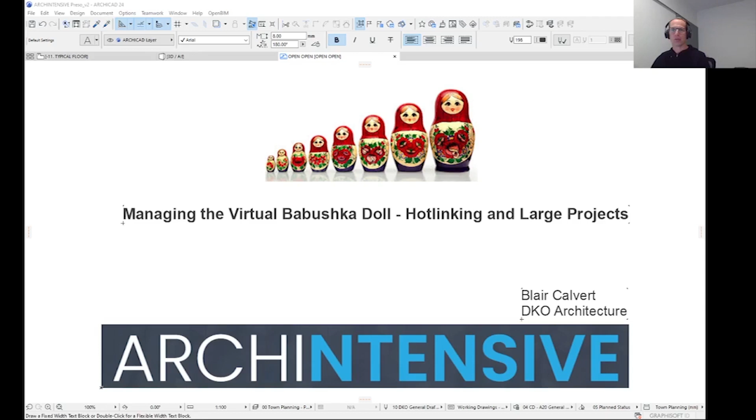So I'll give you a quick intro about DKO. Who are we? We started off in 2000 as a handful of people in Melbourne. We've now grown over the years through a fair bit of regression, ups and downs, and we're now running at about 200 people, primarily across Australia, but also in Vietnam and an Auckland office. Melbourne would be considered our key home office with close to 90 staff there.

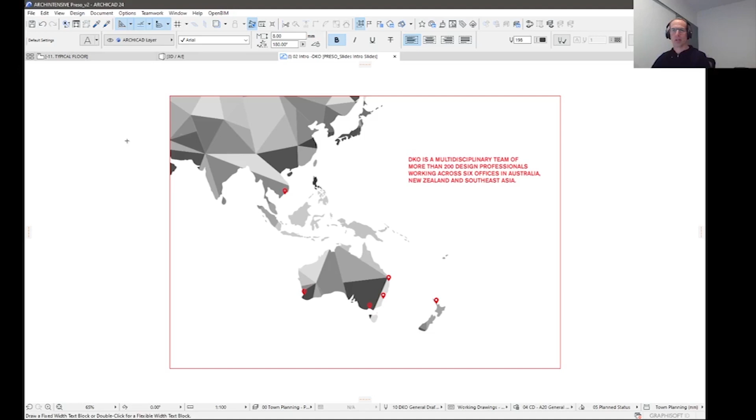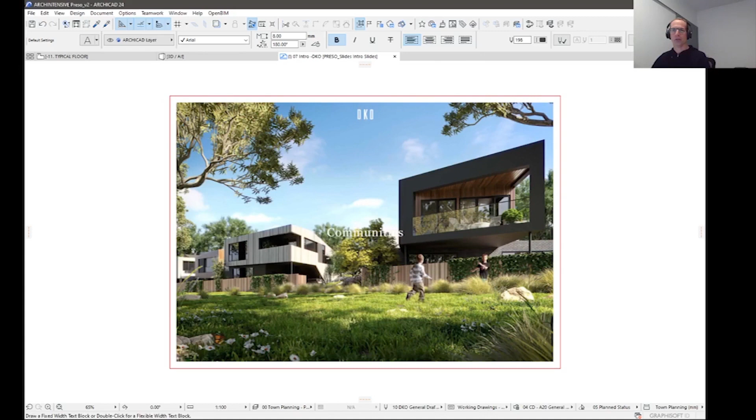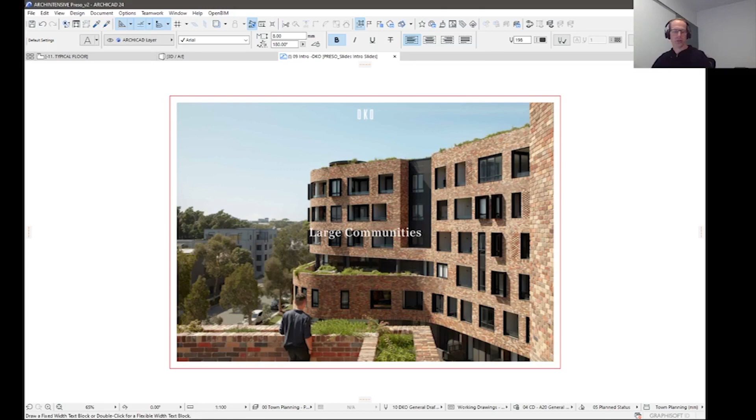So what sort of projects does DKO do? Everything from interiors, one-off homes, terrace homes, communities - and there's a variety of communities that we do from a master planning level. Some are small communities, apartment blocks and the like. Large communities where we do multi-use, multi-res, and vertical communities. So we do a few high-rise buildings, a number of which - this is Marina Tower, which is over 40 stories, about 450 apartments.

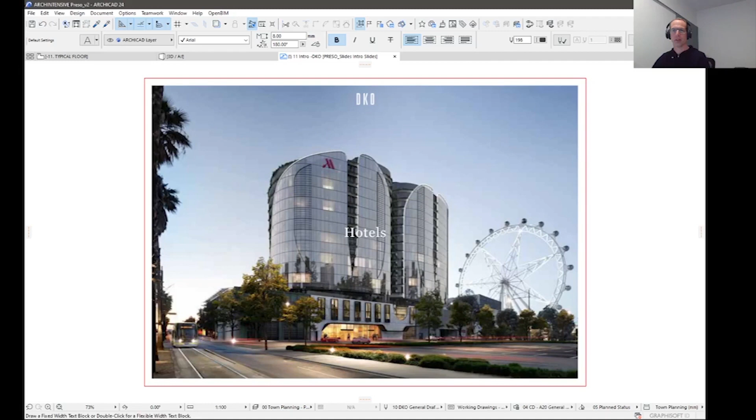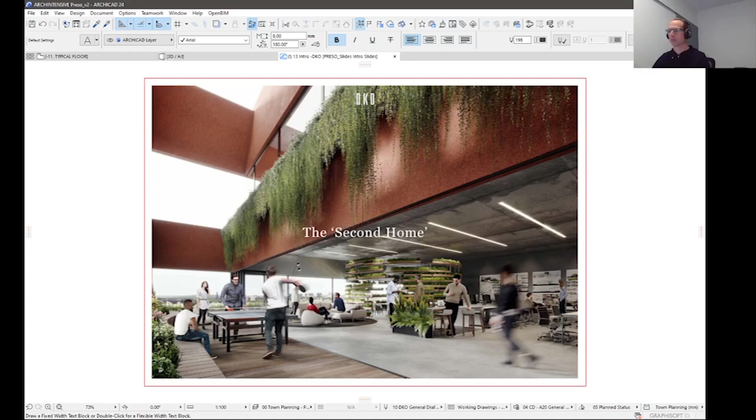In recent years we've done quite a bit of hotel work - this one's the Marriott in Docklands. Hotel interiors obviously tie in with that. Second home, also known as the workplace. And urban design - so a fair bit of master planning, urban design component. This is Docklands, obviously encompassing Marina Tower.

Why is this relevant for what we're talking about today? We'll be talking about large projects, specifically tall ones and wide ones. Where that's relevant for modules is we use a lot of modularity in our designs and our documentation, and Archicad works very well with modulation. We find that the nature of the company and the size of projects we work for, and the teams that we construct, tend to push us in directions in regards to where the workflows are and how we use our modules.

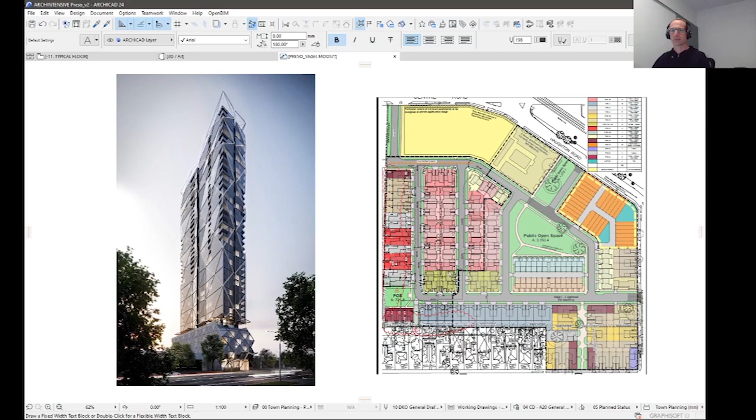So we'll run through a couple of basic things in regards to modules. Worth noting that the general out-of-the-box Archicad guide on modules is worth a read if you're unfamiliar with what modules are. I'll give you a bit of a rundown here. In essence, you're looking at modules as a mini PLN file, effectively - a small file which contains plan information, 3D information, but not a lot else. It's fairly well stripped back, so it doesn't contain any views, sections or elevations, and it also has a very limited range of libraries and attributes attached to it. So you'll find they are substantially smaller than a PLN file.

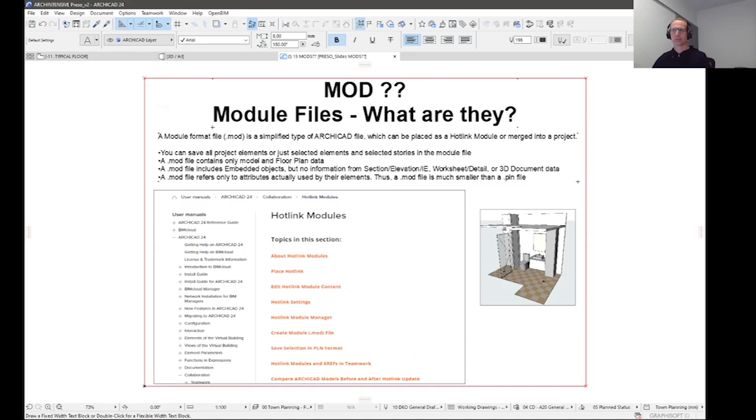Why do we use these things? A very small example here, but effectively efficiency and consistency - the ability to use the same thing over and over again and not have to re-document it in every instance. You start working in types rather than instances, which works very well from an efficiency point of view. There are a few parameters around that.

Obviously, a module is exactly that - it's a module, like a Lego brick. You can't alter it, and so you can't modify these things as you go. You need to be really rigorous about how you use them, because every variation either breaks the module or creates a new module. And you can get to a point where if you've modified enough modules, it probably wasn't worth having modules in the first place.

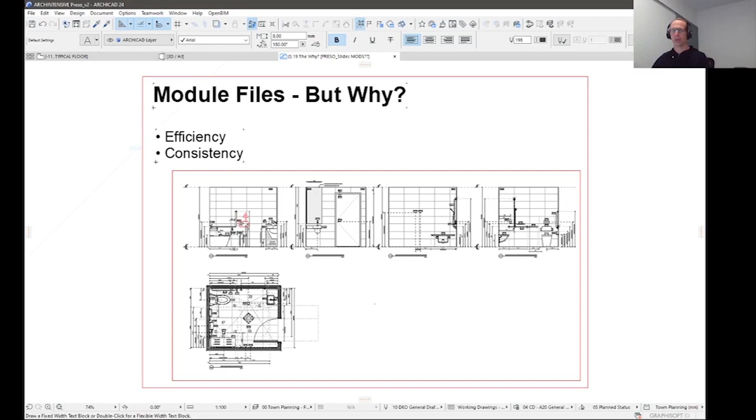So you can see an example here. We've got a bathroom type. This bathroom type will be used throughout a project. All going well, it'll be used numerous times to the point where you could have it documented once,

but exists 50 times across the building. Also consistency - we find that if you have specified a product, you draw it once, you specify it once, and it's consistent throughout the project. Downside of that is if you've got it wrong in one place, you'll have it wrong in 50 places.

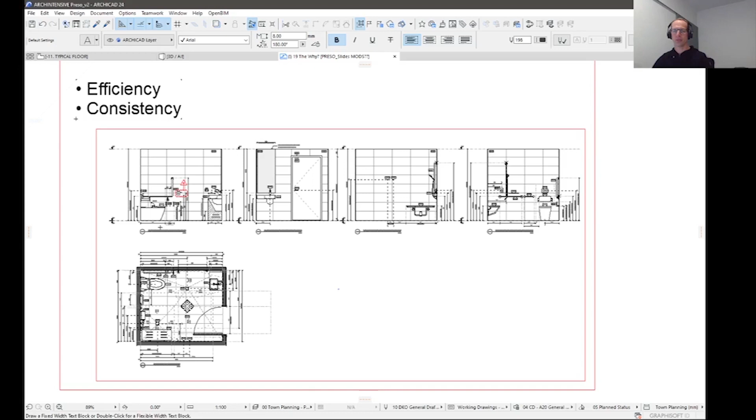A couple of basics. Now, there's a couple of snapshots out of the Graphisoft guide. We'll talk about the way DKO use the modules and how we think you should use them. So how we'd recommend - a couple of examples here.

One of the methods of creating a module is to do file save as from a PLN, and it will basically save out a .mod file of it, and it will dump out pretty much all the associated extra data in there other than just your floor plan data and your 3D data. So any views, attributes, external libraries, etc. will all disappear.

You really shouldn't be creating modules like that if you're planning on using them throughout a building in a modular sense. Saving stories as a module - would recommend against this as well. The primary thing is if you're going to push out a module, it really should be a published entity.

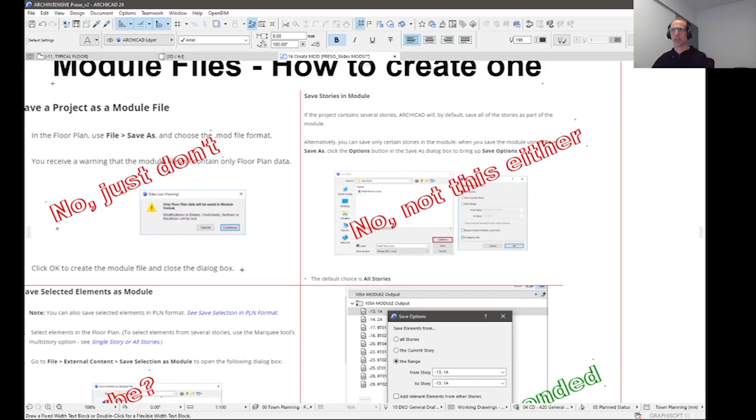And saving selected modules or elements as a module, you can do it. You can basically select things on a floor plan and do save as module. There's instances where you may want to do that, especially if you're doing some rapid prototyping and you've got a number of different examples all drawn up on the same floor plan.

The issue with that is consistency. If you inadvertently select a different group of elements from the initial elements that you'd selected last time you saved that module, you'll get inconsistent results. The other trap is if you've got things grouped, you may find that one item that's grouped inside a selection you've got ends up expanding your module out well beyond what you thought it was. You may have elements halfway across the page that you weren't expecting.

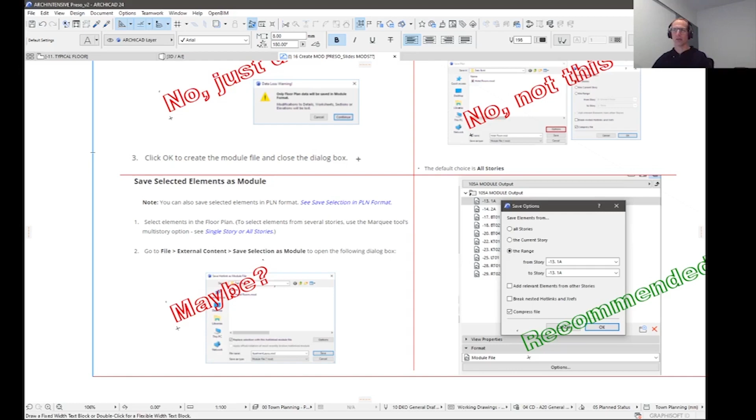90% of the module creation that we would do at DKO is out through a published set, and you go through and it's a story by story thing, and you'll publish the element out. It gives you a consistent response in regards to the naming always being the same. The content obviously will change in itself, but the parameters around the content won't, so it'll always be from the same floor plan, from the same layer combination, etc.

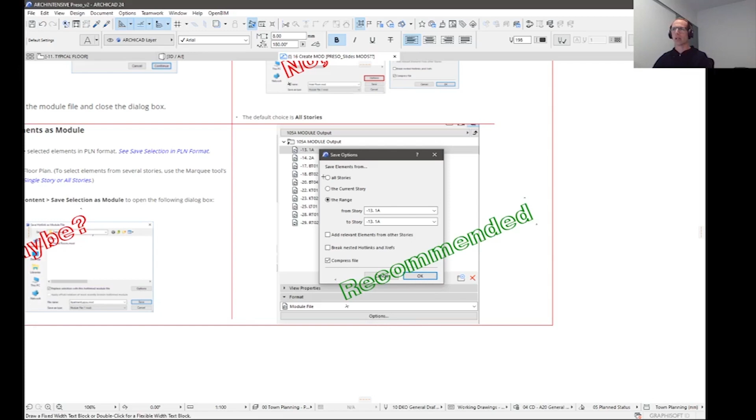So I'll just take you through a quick thing here to show you creating a mod. So I've got a file here with a bunch of template content in it. So here we've got a bathroom. You'll notice it looks pretty messy. That's because we've got all the layers on.

One important thing to note is when you publish out a mod, it will only publish the things that we'll see on screen. So your layer combination - we've got a layer combination here called modules out, which is generally the majority of the layers that we have in our layer list. The layers will be filtered at the other end in regards to what you're looking at. So the project that you insert the module into, it will just use the layers and layer combination from there.

You're better off publishing out more modules, more layers rather than less. Another key trick is if you're using any solid modeling operations, and that's a hidden layer that you would use, the solid modeling layer that you use must travel with the module, otherwise you'll lose that linkage.

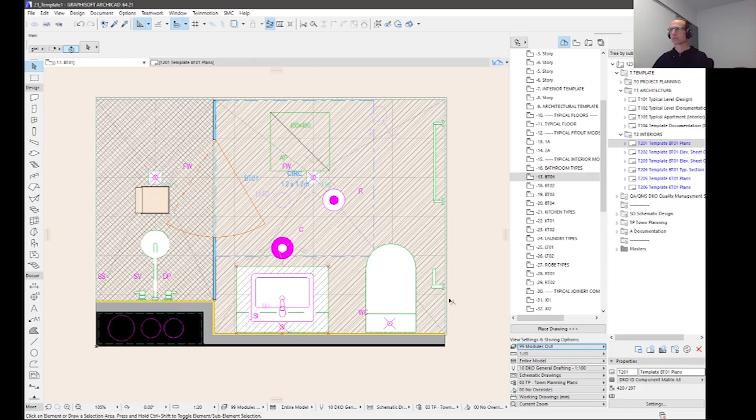So in regards to how to publish this out, I've got some content here. It's on -17. From here you can see that there's bathroom type 1 here. We've got the modules out layer combination, which has everything you've got there. That then transfers out into a publisher set.

Pay attention to these. It's important that you check these settings. This is just a single story mod, so it can go out just with the current story range. If you're doing something along the lines of a townhouse or other multi-story mod, you need to check this range and select the range for what you want to publish out.

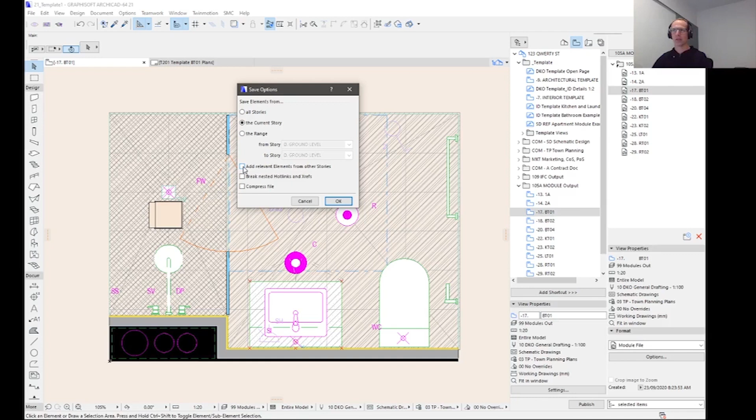We generally leave this one off. We don't generally want to see things published from other stories, especially if you've got things showing on level above, like a stair or something. You may well end up with duplicates of that being published in like a negative story or a lower positive story.

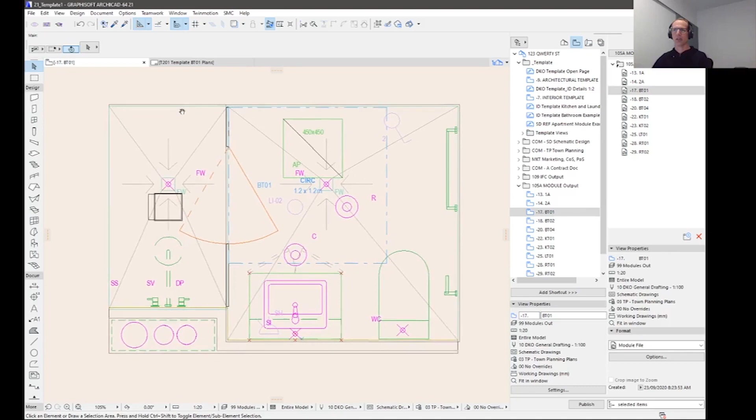So from there, basically you press the publish button, and that'll publish out a .mod file. .mod files are usually very small, we're talking hundreds of kilobytes. If you find that your modules for kitchens or bathrooms or other small things are in the megs, you'll probably find that there's either a large library part or something else that's bloating the file.

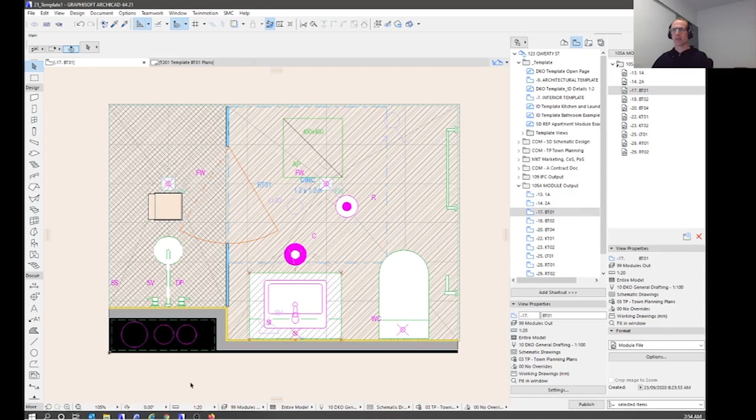Once you've created that mod, it's fairly easy to place it. Within the Place Hotlink dialog, you can go through and just select it from there. So as an example, we'll just plonk this over here and place hotlink.

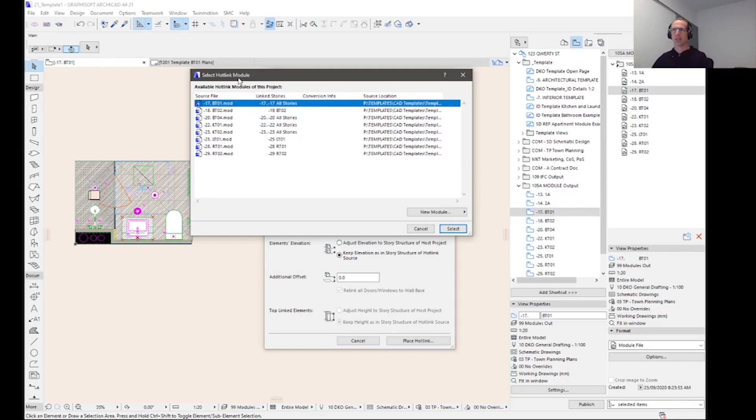You'll see here there's a list of mods. In any file, if you've got mods placed already, it'll have a cached memory of these. One thing to watch in a teamwork environment, these are very hard to change. If you have two mods of the same name, or you're swapping a mod of the same name, you will struggle to do that in a teamwork environment. If it gets to that point, you may well have to save out a PLN, clear out the mods that you need to, replace them, and then put them back in. As teamwork works, it caches, for lack of a better term, memories of mods on your C drive.

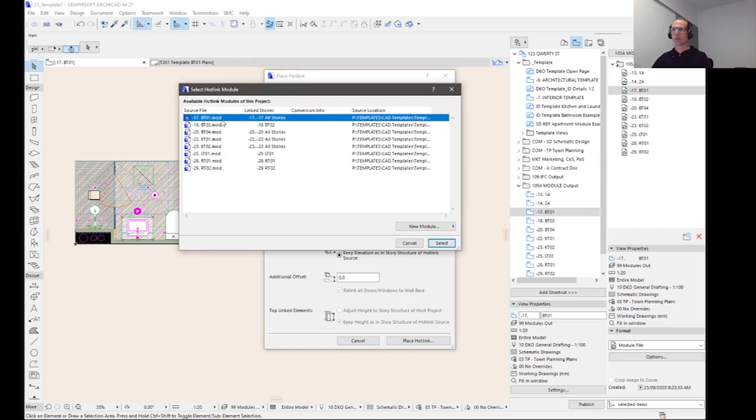So I'll take this here, select master ID. This is a handy tool for being able to add extra data to the codes within the mods, also very handy for using for graphic overrides, etc. You can do some handy tricks with it.

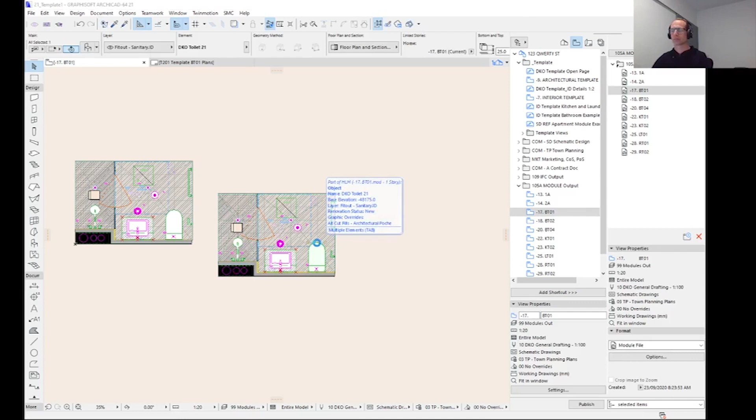So if I grab this tool out here, and bring up settings for this, you'll see that the BT01 Hotlink module master ID has actually been appended to the start of the name of the ID of the toilet. That'll come in handy later on for identifying and labeling things if you need to utilize that.

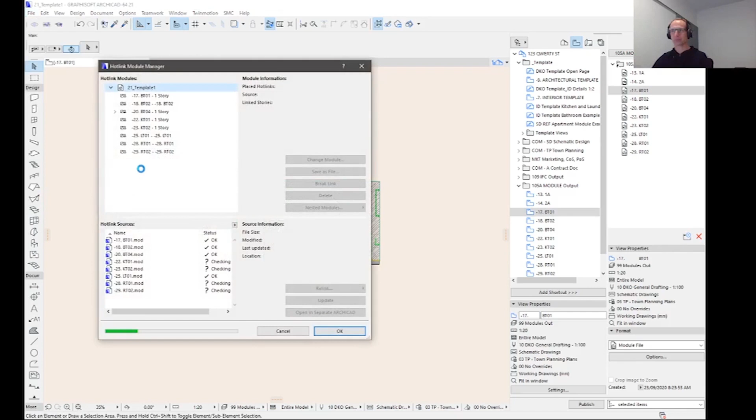Updating modules. We go through external content, Hotlink module manager. In a solo environment, this is a fairly easy thing to use. You can go through - any mods that have been published recently will come up here as being modified in status.

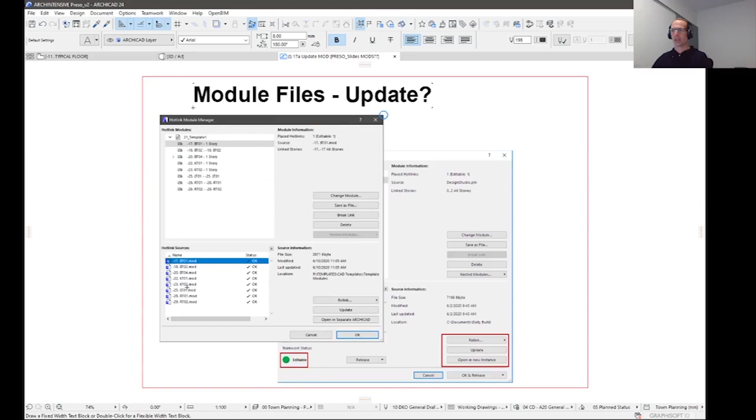In a teamwork environment, it becomes a little bit trickier. You'll find that there's an extra toolbar here which comes in, and you need to reserve and release. It can be quite cumbersome to work with. Definitely recommend that you have one person designated, or at least one person at a time designated to be looking after this, because it does require a lot of reservation, opening and closing the Hotlink module manager, and that becomes quite a lengthy exercise if you're in a project with numerous people and a large number of modules that you need to work through.

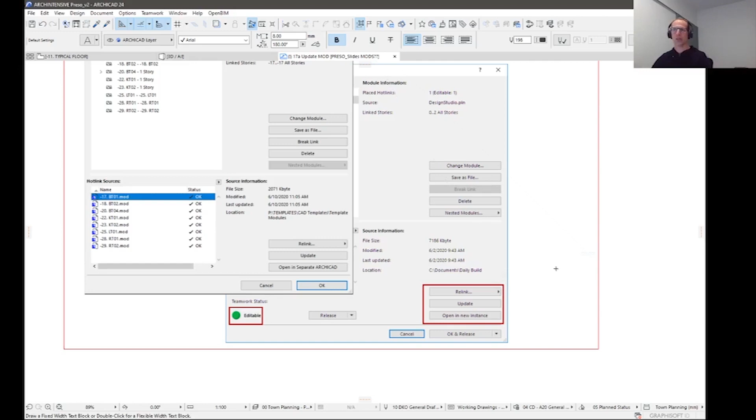So in here, you'll find that these will be listed as modified. If they're listed as missing, check your file paths through there - you may have an error with that, something's either been deleted or moved. The other catch can be that if somebody has renamed a folder, the path linkage is out. You'll see here that these modules are quite small, basically talking sort of 2 meg each, give or take.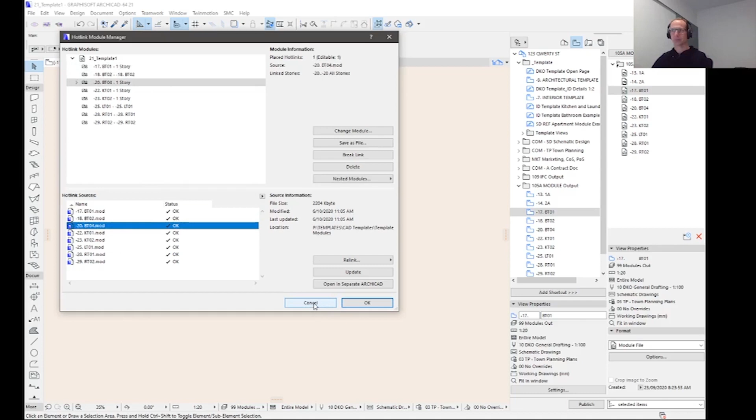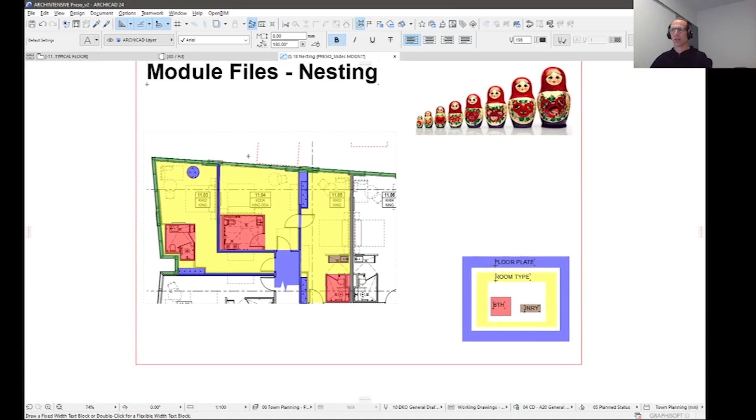Okay, nesting of modules, which is where the babushka doll comes in. The ability to nest modules within other modules is very handy and becomes quite efficient. Just as a general diagram here, I've thrown some colours on a section of a floor plan to identify: the green is the facade module, the bluey purple colour is the floor plate itself, and the red is the kitchens and bathrooms.

These are all repeated through. This is a little snapshot of a corner of a building which has got mixed use apartments and a hotel in there.

I'll just jump across to what that looks like in here. So you'll notice there's the nesting of the modules in here - you'll see there's a typical level here, and within that typical level there's a double type room, and within that double type room is a bath type and a vanity type.

This can all get a little bit overwhelming. If you've got a large project, it's worth having this mapped out onto a worksheet somewhere, so you can introduce any of your staff into it. It will take them a little while to get their head around it, and it can become quite overwhelming in regards to these. One thing that's worth noting is this guy here, the show hierarchy in browser.

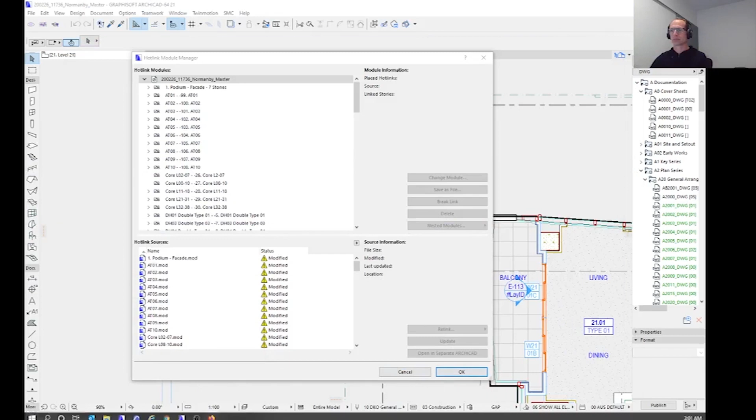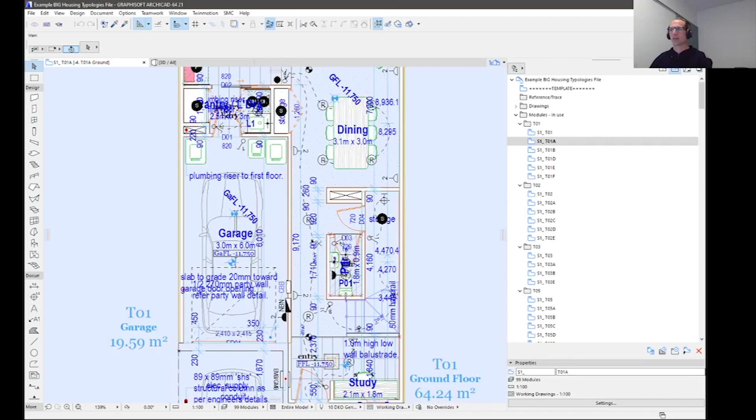Another example of this, fairly messy, but this is basically a townhouse in here. If I jump in, try to put this onto something a little bit more sensible as a floor plan. You'll notice that this is a P01, which we determined to be a powder room.

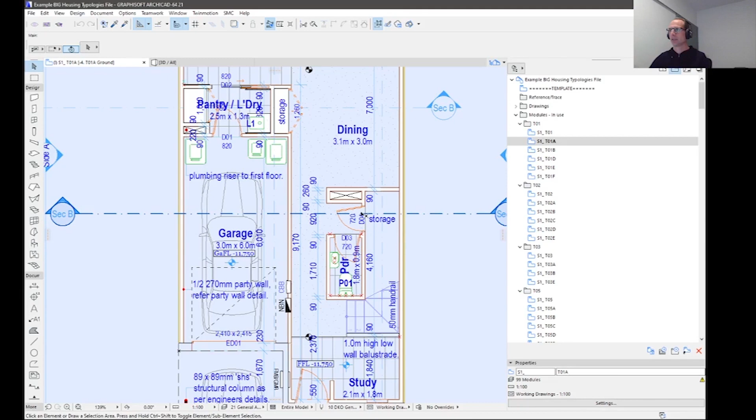Our computer's running a little slow here. And that's a bathroom type 1. And the bathroom type 1 is actually then nested inside townhouse type 1. And then there's a facade wrapped around that.

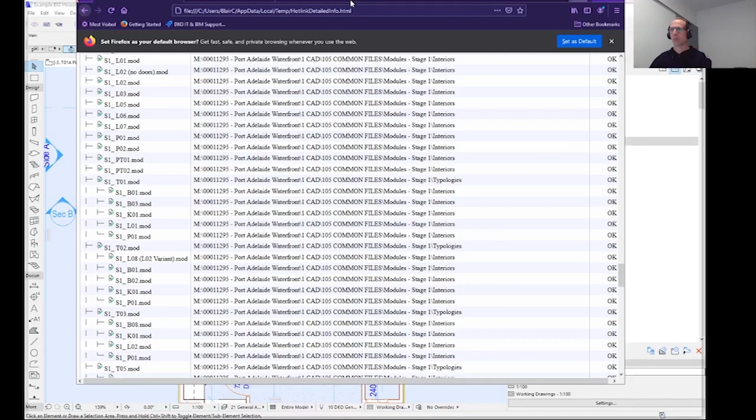So when that enters the master plan at the other end, it will basically be a complete house with a facade wrapped around it. Inside that is a housing interior. Inside that is the kitchens and bathrooms and mods, etc. And that's how we get into this sort of nesting here, where you come through and find that there's bathrooms, kitchens, laundries and powder rooms all in that area.

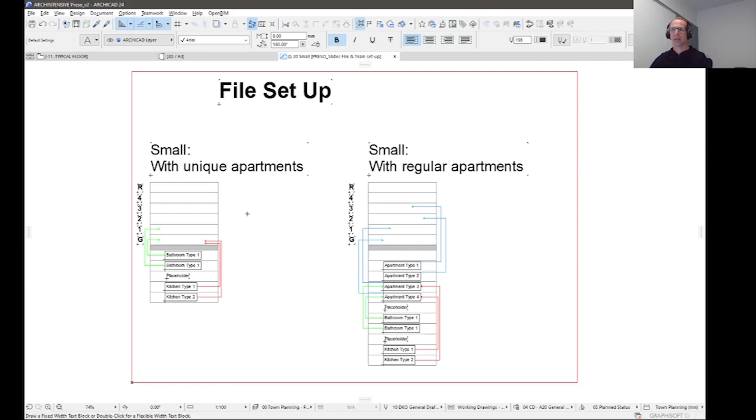I just wanted to talk through file structures. Some fairly simple diagrams here. With any of our smaller type developments or projects, we'll generally try and run with a single file. It simplifies the attribute management immensely, also the library management as well.

It's good to have a policy of basically ordering how you do these things. So you get bathrooms and kitchens, etc., on negative stories, and then linking upwards. It's important you're clear from the start which way these things go. It can get confusing if you've got things on bathrooms above the building and kitchens below the building and then linking them up.

From a rationale point of view, it's better off if things flow in one direction, either up or down. We've tried both, but generally we find that building things down and then linking them back up is the more logical way to go.

Also, it's important that you have a look at the project from the outset. In an ideal world, all the kitchens and bathrooms will be nice and regular and modular right from word go. That's not always the way it works. Generally, designers like to have more free reign than to be clipping Lego blocks together.

So you need to have a look at what's the largest easily modular portion in that. So on a large project which is reasonably regular, you might find that's a floor plate. Next step down would be an apartment, and then step below that would be kitchens and bathrooms.

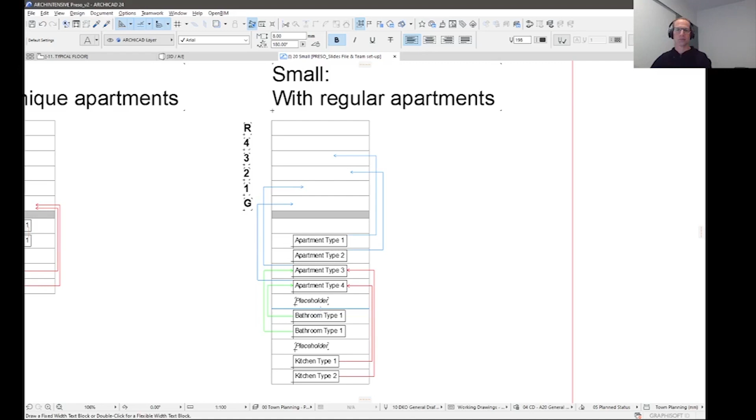Step up from that is a sort of medium to large file. We end up using this for quite a few of our projects, I'd say almost the majority. We tend to run larger projects in larger teams, and we have a fit out and master.

The attribute management comes a little bit trickier in regards to the fact you're managing two files' worth of layers and building materials, etc. But we find that it splits the teams nicely.

We have different workflows where we'll have upfront design, general massing, design, town planning. Once we get into DD, we find that the workload on the interior side ramps up a fair bit, and there's coordination between structural, mechanical, hydraulic in there.

We also end up quite regularly having to put out marketing documents from that. We find that splitting the file into a fit out and master component works well - basically all the kitchens, bathrooms, apartment types all get pushed out as a .mod file and linked into the master.

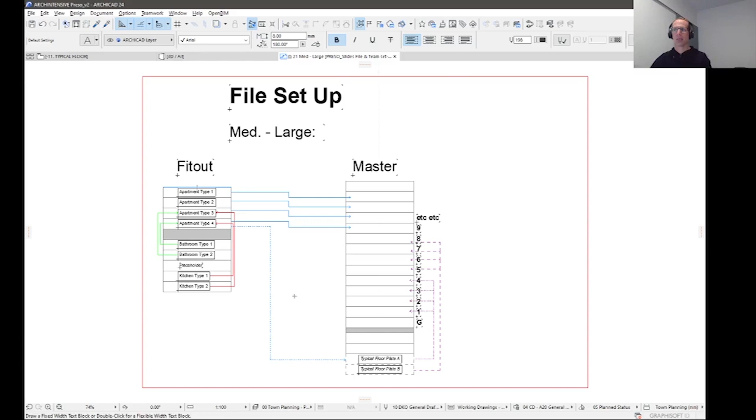Sometimes we'll find typical floor plates, which is handy if it works - it doesn't always happen that way. And then we'll link things into a negative story and then up into the floors in the master.

Stepping up again, we get into a fit out, master, and layout book. We will split the layout book out of the master file when it gets to the point where it's too large. We find that the storage in the teamwork file of all the views on layouts creates a fairly huge data load, and it really bloats the file size out.

We've found historically that splitting off the layout book and just running a PMK export usually always helps the master file stay a bit lighter, and will help with send receive times, reserve, open, close, etc. from there.

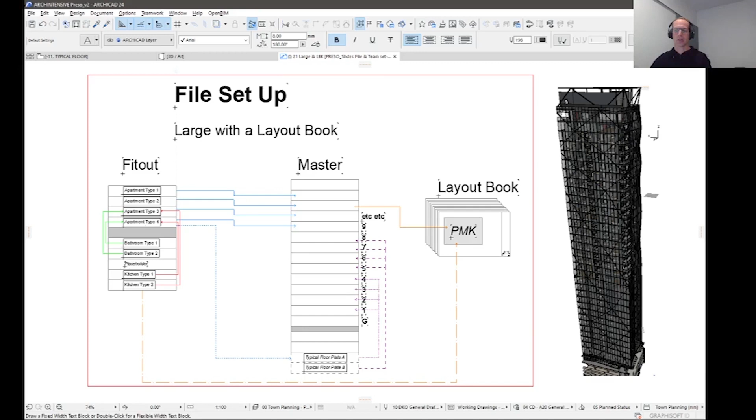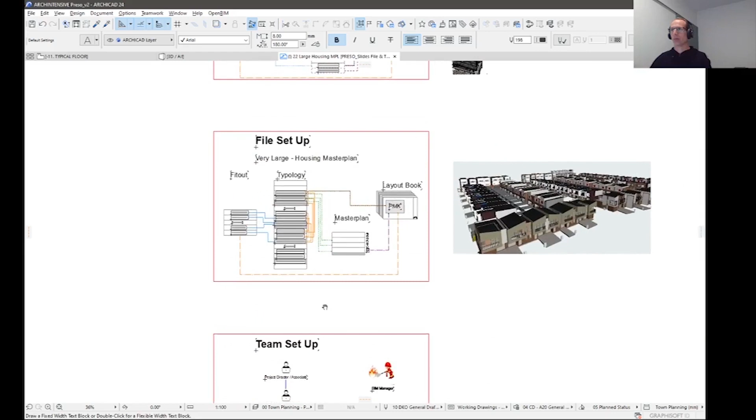A little bit of a different tilt on this one - housing typology. Housing files are a little bit of a different beast.

We will run with a fit out file for all our smaller stuff, kitchens and bathrooms, but we also quite often extend that out to robes, powder rooms, basically anything that we can use from a documentation point of view over and over. When you're doing master plans involving 200, 400, 1,000 homes, having the ability to document things once and then use them numerous times is invaluable.

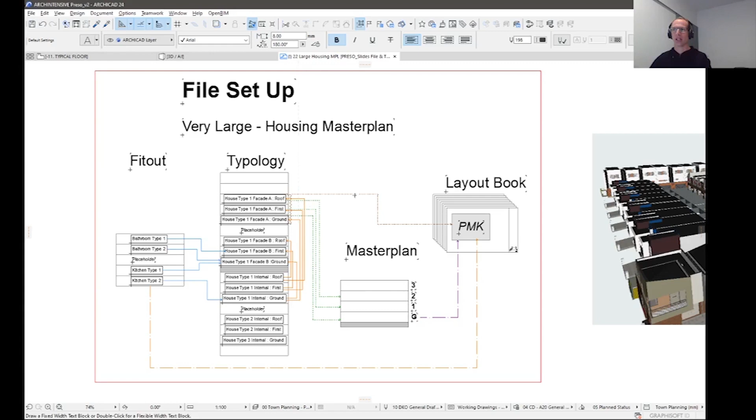Just for an example, we've got a project in Adelaide. We've got 10 bathroom types total, and that's over 1,000 homes that they're servicing. So you've got effectively 10 sheets of documentation for a bathroom, and that's being used in over 1,000 homes.

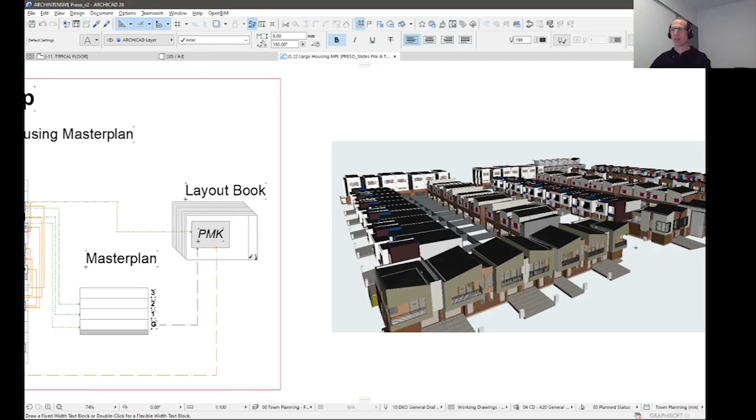There's quite a bit of repetition in how we work and how the home builders work. We find that the typologies we can reuse numerous times. Generally what will happen is the streetscape will have a similar typology, and we'll run that with different facades along the front, but fundamentally the building underneath is the same.

Another thing worth noting here is the master plans are actually quite small files in regards to how many stories they carry. Obviously they carry a lot of content, but the typology files, when you're using townhouses or houses, it's a multi-story model, and we'll use that.

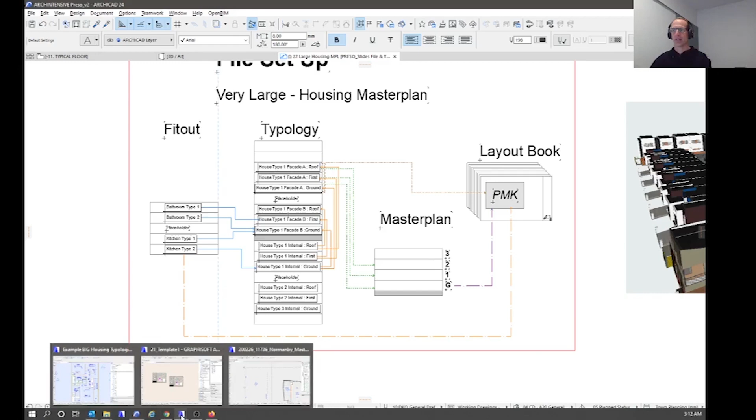So we'll have basically an internal, and then the facade, and then another facade option. That starts getting a little bit silly - by the time you've done the typologies and you go through, you'll find that these files start to get pretty large.

This one's 780 down and 268 up, so just over 1,000 stories in there, which may sound a little bit ridiculous, but the actual file size from creating all these stories is not as large as you would think.

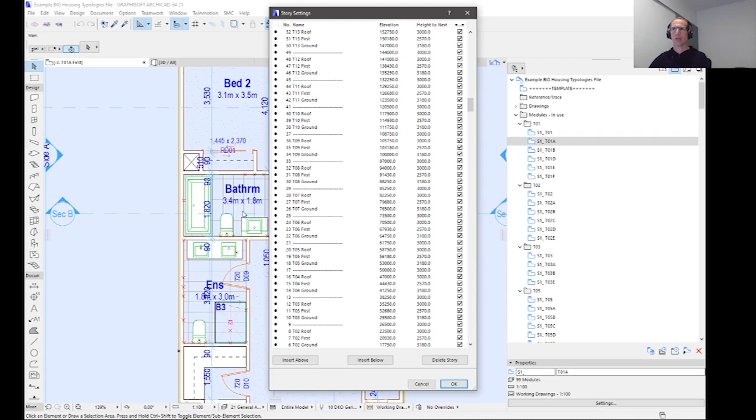The actual content per story is quite light, and we generate a lot of the documentation out of here. From the master plan it's light because you're only producing documents for the house that's site specific, whereas most of the drawing actually comes from the typology file itself.

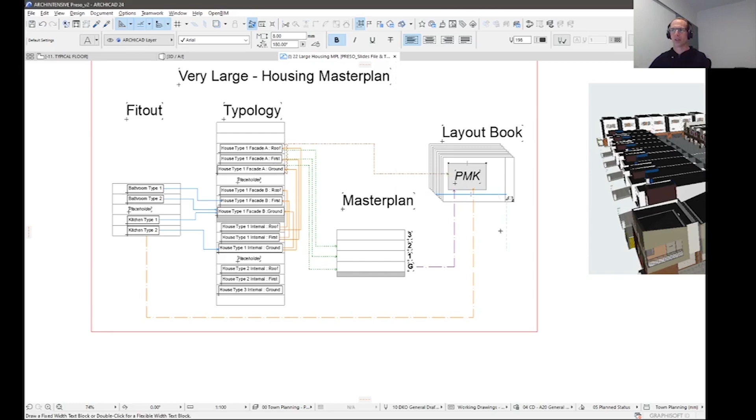So you'll see that the kitchen, bathroom types, etc. follow the path via PMK, and they move across to the layout book. The site files come across to the layout book, and then the typology, so the per house type documentation all goes to the layout book, all via PMK, whereas the modules follow a more orderly path through fit out, typology, and master plan.

Pretty simple diagram here. It's probably a gross simplification. Team leader, model manager here is in red. When you get into large teamwork files, especially, the managing of the Hotlink module manager becomes absolutely critical. Very much in the same way as the updating and issuing of drawings, that really needs to be a singular person running that. Or at least one person at a time running that.

The difficulty in a teamwork environment is that you have to reserve and release the Hotlink module manager every time you update. It can become a very substantial bottleneck on a large project if you've got numerous team members overlapping. It's also important to note that you should probably have your permissions in teamwork set so that the team leader / model manager has rights to everything, whereas your standard team members don't necessarily need rights to all of the things.

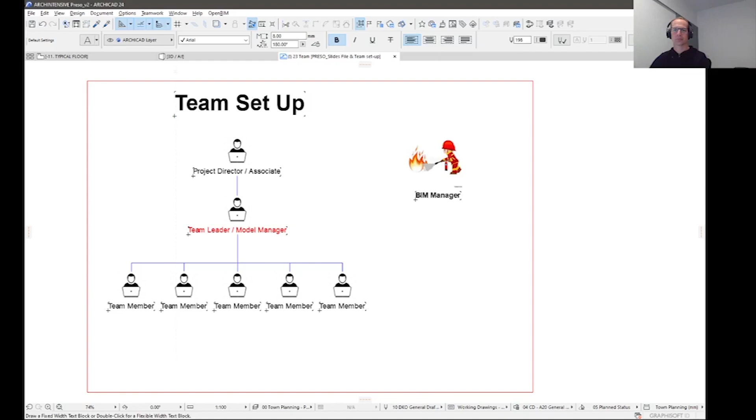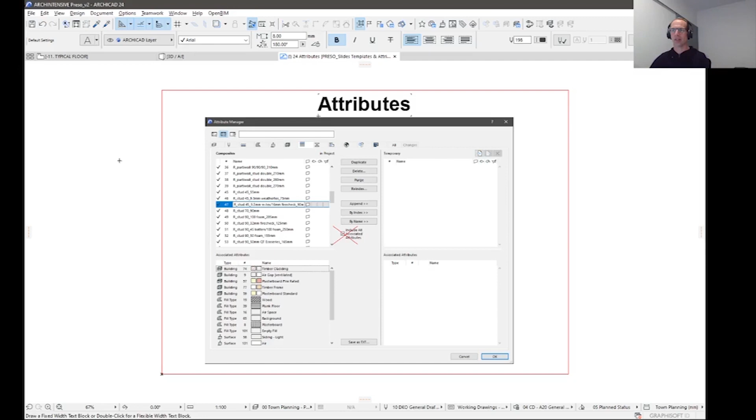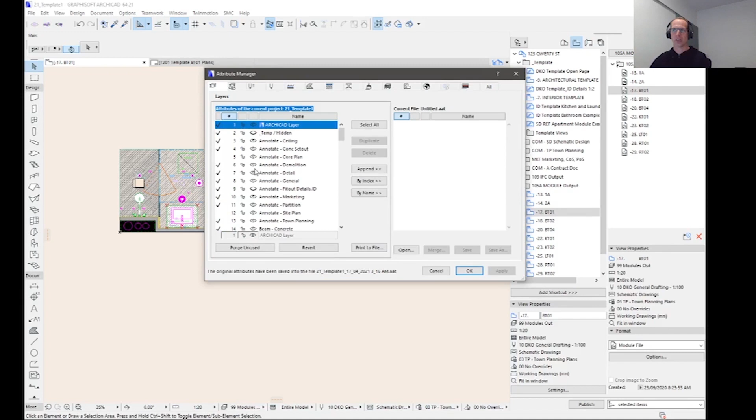Couple other things to cover on this. Attributes, bane of every BIM manager in the history of Archicad. A lot of the reasoning behind running one or two files rather than running a whole raft of different PLN files and then linking them back in is surrounding attribute management. The way Archicad carries its attributes around is difficult to say the least. Just as an example, if you needed to add a wall type into a file, we would usually drive that from the typology file. That's generally where the need is, but you need to designate one file as your master file for any attribute management in here. So just as an example, I'll choose composites because they are the absolute worst.

Actually, I'm in the wrong file here. I'll just bump across to 24. Just wait for this to load up.

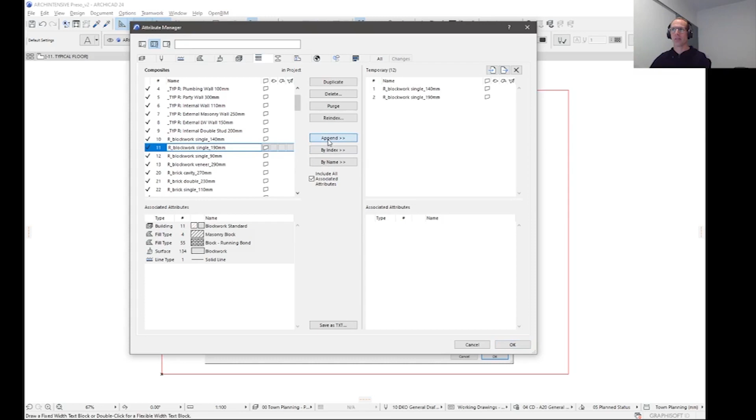This box is not your friend. Do not leave that box clicked if you are updating attributes. Just for an example, I'll take a fairly standard blockwork single wall here. It's got a bunch of associated attributes that go with it. I'll append that over there. I'll then grab pretty much the same wall, just a slightly different width, and append that over here. If we now have a quick look through, you'll see that it starts to replicate all these things.

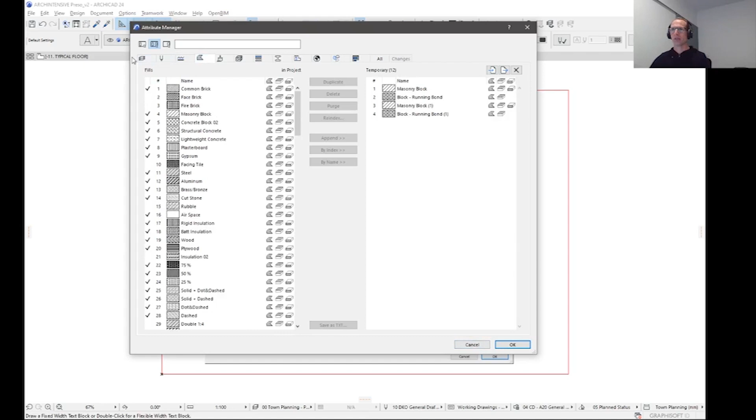If you then publish a mod out with these attributes in it, it will then pollute your master file as well. If you can imagine doing that with every attribute, if you do that a number of times, it gets out of hand very, very quickly. You do not want to have this box clicked. If you can't avoid it, tread very carefully. If you don't know what you're doing, you need to go and ask your BIM manager. It can cause absolute nightmares. The other one is embedded libraries. I'll get to that in a minute.

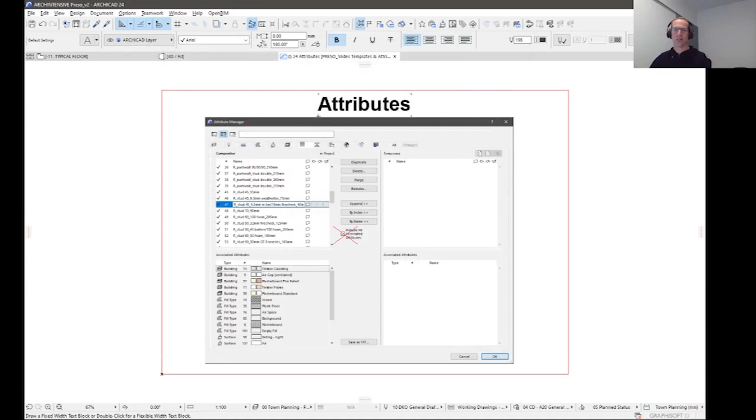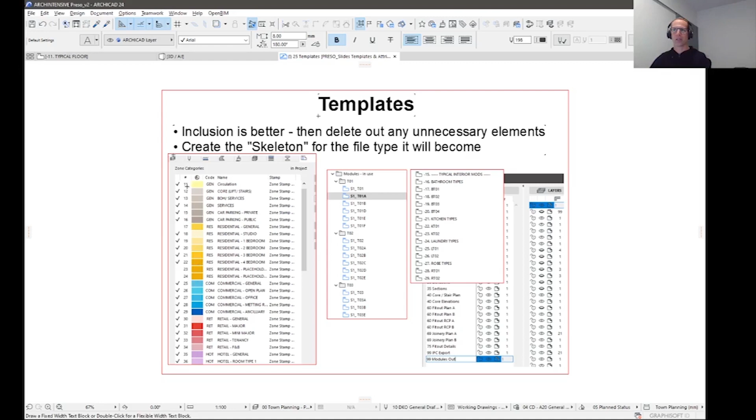Templates. Have your template set up with more than you need to start with. You'll find that it is easier to delete things out. This index number here is absolutely critical to how Archicad works. You are better off having things already in the file and deleting them out if you don't need them, rather than adding them back in. The chances of getting the index number right if you're manually entering things into files is slim to nil.

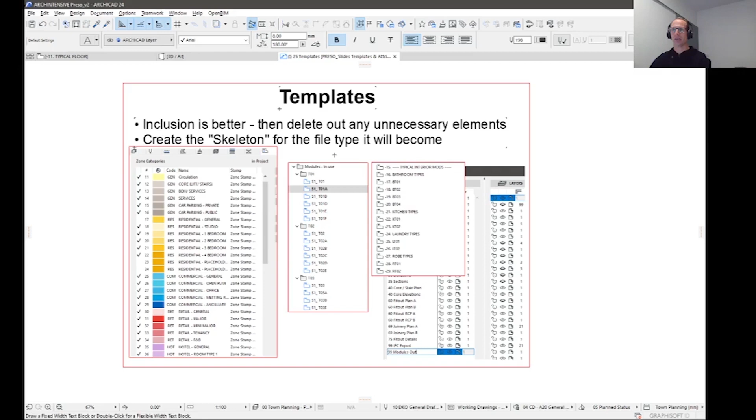The other thing is the files that you set up should be fit for purpose. You need to take the work out of the staff members' hands in that regard. You should have a skeleton file effectively set up. So if you have a look through this one here, when we have a typology file master set up ready to go, most of these floors and views are in here. Obviously not quite to this extent, but there's at least a system in place for that, and it's set up ready to go so content can be drawn in it immediately.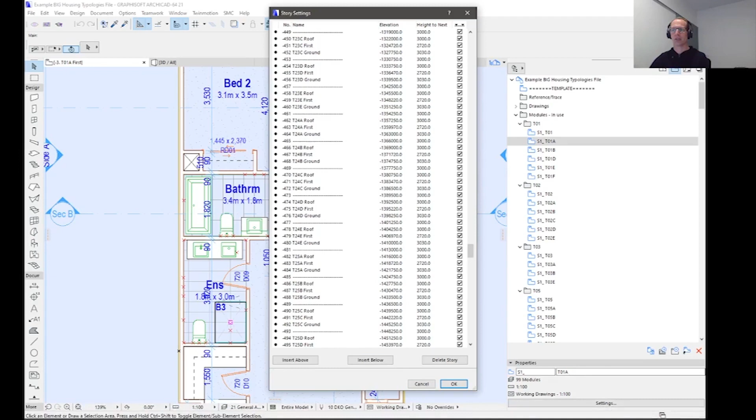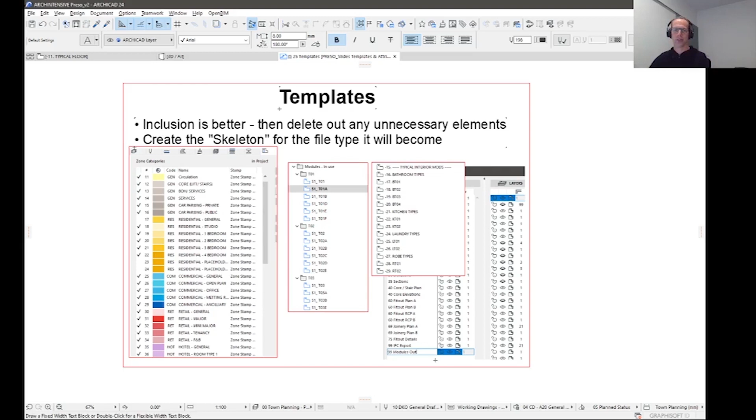Make sure you've got a module-out layer combination with all the modules you need, and make sure it's not custom. If it's a custom layer combo that you're publishing your modules out with, it'll be met with disaster. Things will fall off all the time.

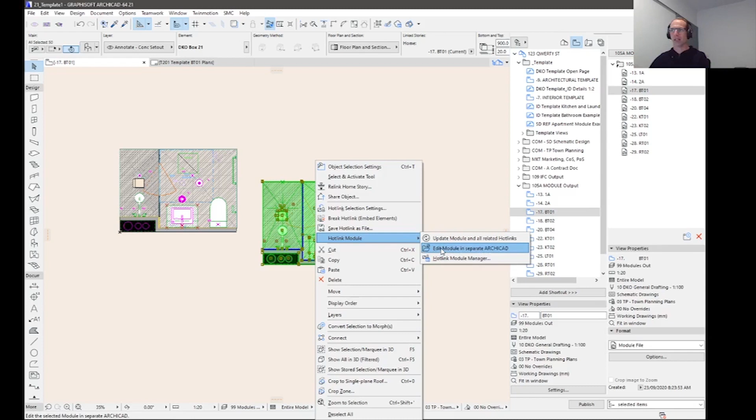Common pitfalls: if you're publishing mods out, which is the recommended method, don't right-mouse-click on a mod and open it up. From here, if you've got groups on, there's the option to open this module and edit it in a separate Archicad. Don't do that. If you do that, press save, and then publish later, it will overwrite any changes that you've made.

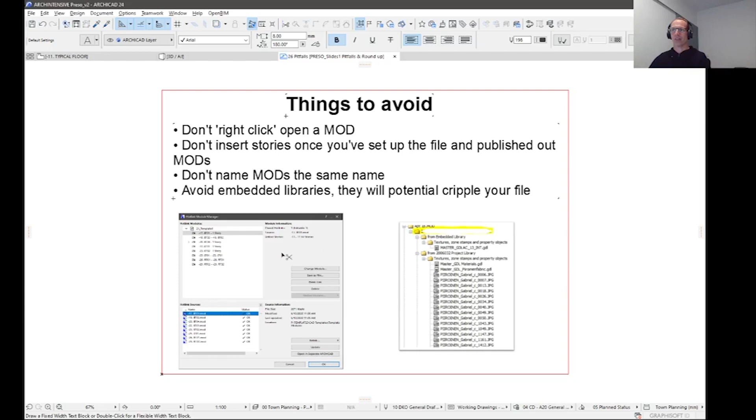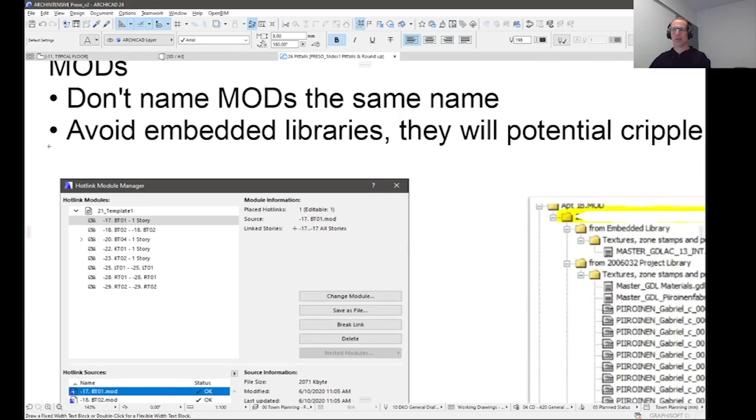Don't insert stories. When you're putting these things in, Archicad remembers the source story. If you insert stories in between - so you'd put in insert above - all these stories now have a different index number for the story. Archicad doesn't cope with that very well at all.

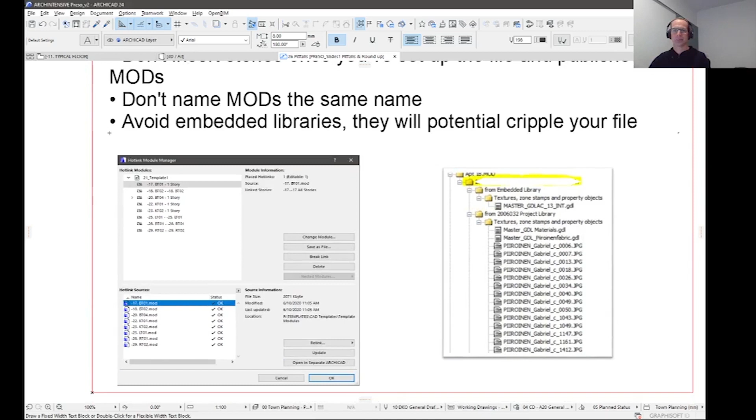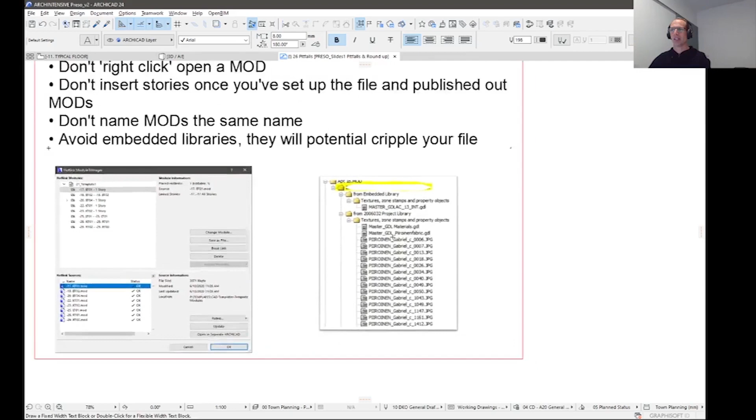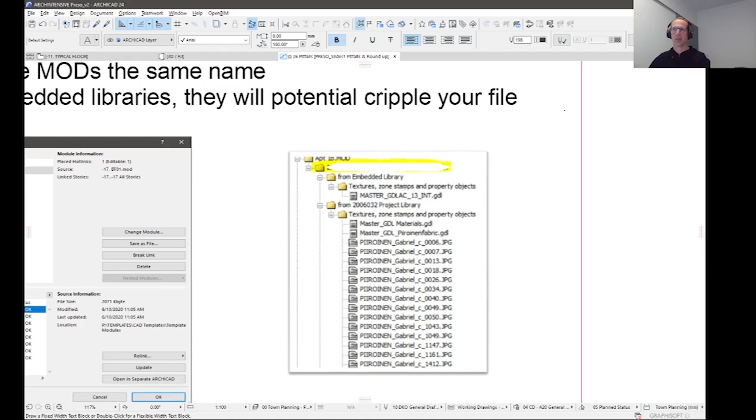Don't name mods the same name, that should go without saying. And avoid embedded libraries. You'll find that if you have anything that looks like this in your library, it will bloat your files - you'll go from a 1 meg bathroom to a 6 meg bathroom. If you times that by 200 bathrooms across the project, it will start bloating your file. Anything with a master GDL script with an embedded library can cause some pretty serious issues.

Okay, a quick roundup. Key points: before you start, have a plan. If you're going into a housing or apartment project, have a bit of a mud map of what you think can be moduled, what you think isn't able to be moduled, and start creating your files on that basis. Always, if you've got a BIM manager handy, have a chat with them about that. Whichever firm you work for should have a raft of templates for these sorts of things, but it's good to have that preliminary plan to start off with. It'll alter, obviously, as projects do, but put some placeholders in there, make some space in the file for changes to happen.

When you're publishing your mods, make sure you check the settings in them when you're publishing them out. So this here in options - check to make sure that these are the settings that you want.

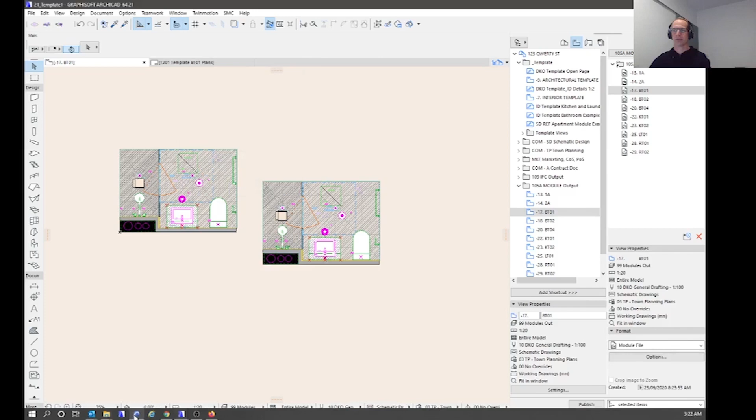When you place the modules, check the settings as well. Same thing again - when you go in to place modules, check to make sure you've set a master module ID, a hotlink layer, and these settings here. Typically you'll want to keep this one here, unless you're planning on having a module which stretches the floor plan, the wall height stretches up and down. If you do want that, then you can see there's some settings to adjust there.

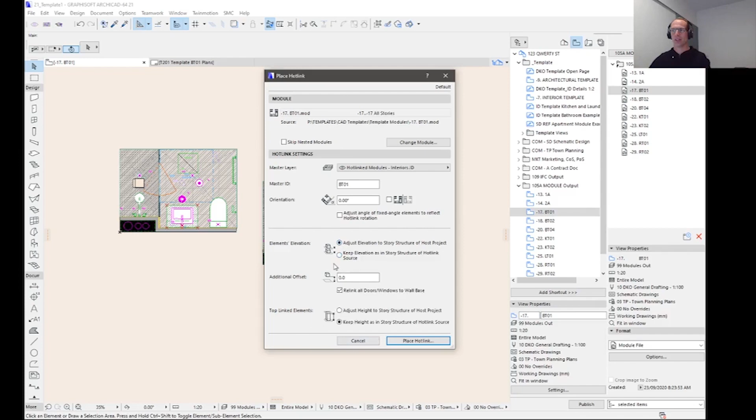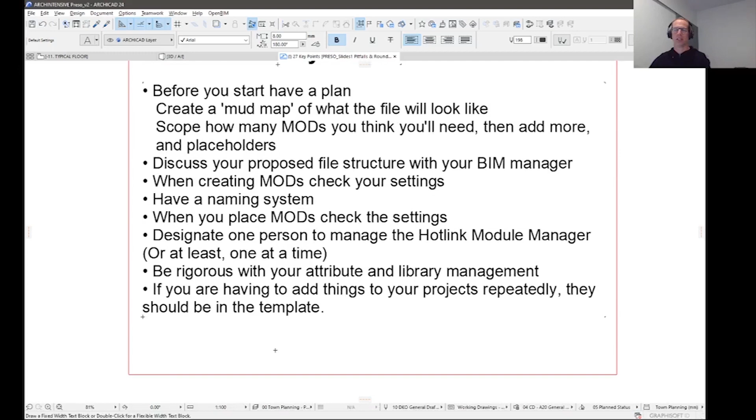Be rigorous with your attribute management and library management. It's absolutely key to keeping your file clean and fast, and to not be bloating it. And if you find that there's things you're doing over and over, they should already be in the template. If not, they should get put in the template.

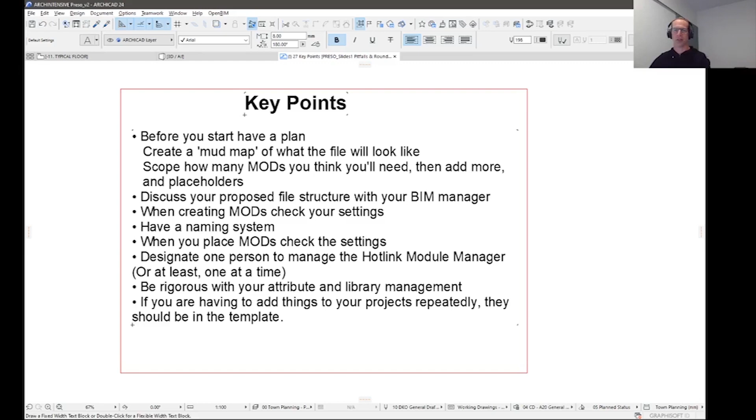Okay, that's it for me. I'll hand over to Nathan for any questions you may have.